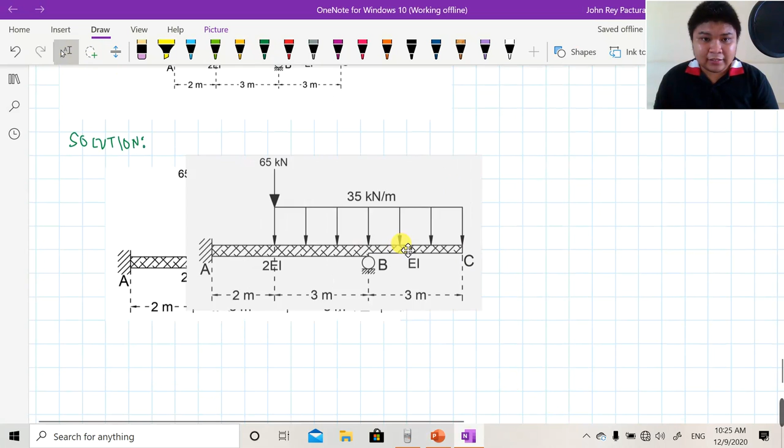For instance, let me label this as our RB. On the other hand, let me also label this as RA, and at the same time, this is the moment at A. So what I'll do is express both RA and the moment at A in terms of RB - so RA in terms of RB, and the moment at A in terms of RB respectively.

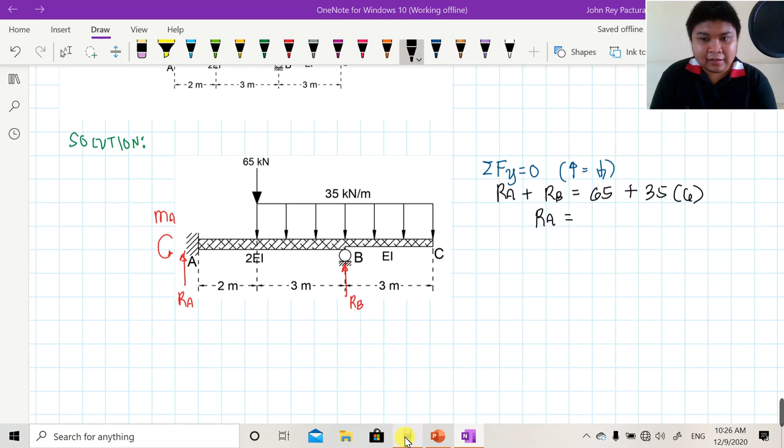Using the equations of equilibrium, summation of forces vertical equals 0, so up equals down. The upward forces are two: RA plus RB, while the downward forces are 65 kilonewton concentrated load plus 35 times 6. Simplifying this, RA equals 65 plus 35 times 6, which is 275, minus RB. So now we have RA in terms of RB.

Let's do the same thing for the moment at A. This time, summation of moment at A equals 0, clockwise moment equals counterclockwise. The clockwise moments are two: the 65 kilonewton clockwise moment multiplied by the moment arm of 2, then the 35 uniformly distributed load with length 6 meters, whose center of gravity is located at 2 meters plus half of 6 meters, so 2 plus 1/2 of 6. Now we've completed the clockwise moment.

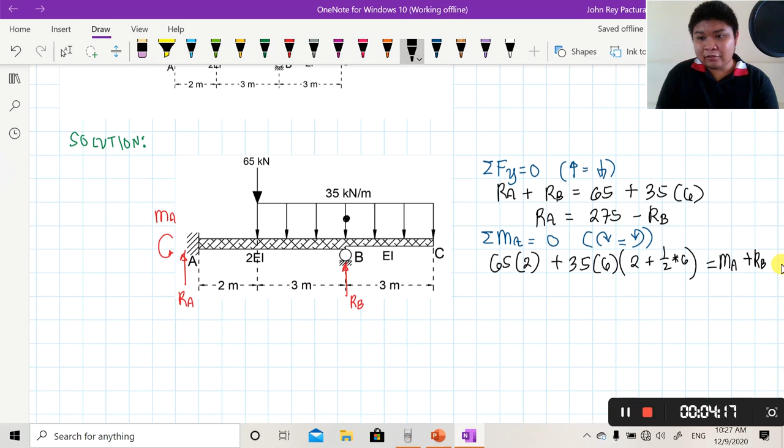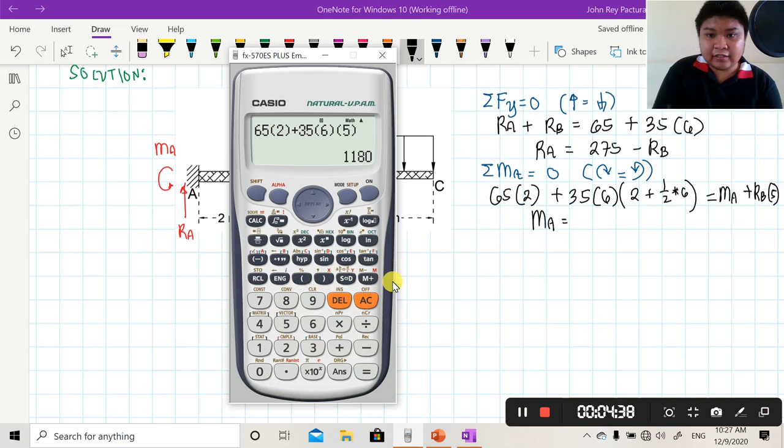That equals the moment at A plus RB times 6 - wait, RB times 5, since the distance of support B is 5 meters from point A. Simplifying this, the moment at A equals 65 times 2 plus 35 times 6 times 5, which gives us 1,180, minus 5RB. So now we have RA in terms of RB and MA in terms of RB.

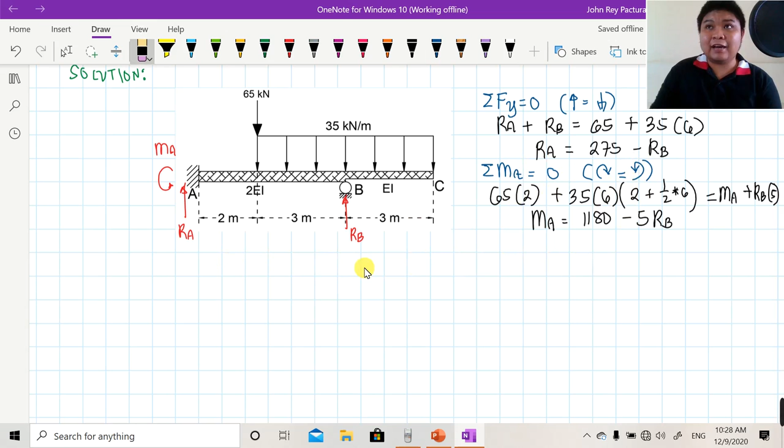Now, after this, we'll draw the moment diagram by parts. How do we draw it? 5 meters, then there's another 3 meters here. Let me draw our original beam first - this is a fixed support, and this is a roller support here. And let's not forget to consider the loads themselves.

Then, is this the load? At the top, 35 kN per meter. Okay, 35 kN per meter.

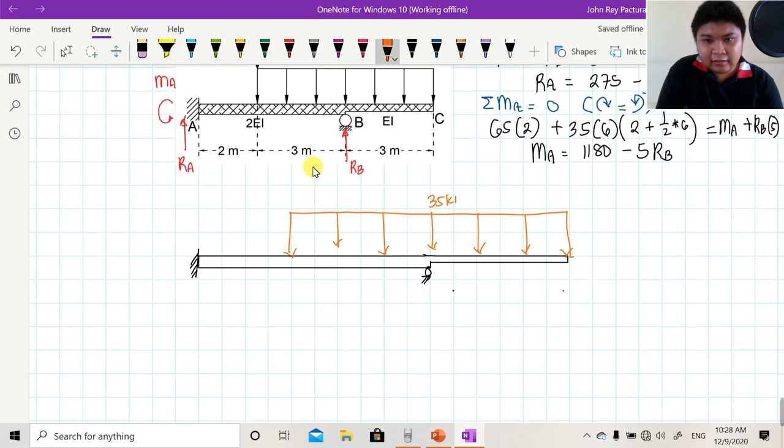Then, 65 kilonewtons. Let's place our reaction as RB. But instead of RA, let's write it as 275 minus RB. And instead of MA, let's write it as 1180 minus 5 RB, so that at least only one variable class appears as unknown here.

Then the distance, of course, this is 2 meters, this is 3 meters, and 3 meters. The flexural rigidity is 2EI, then EI. And let's place points A, B, C.

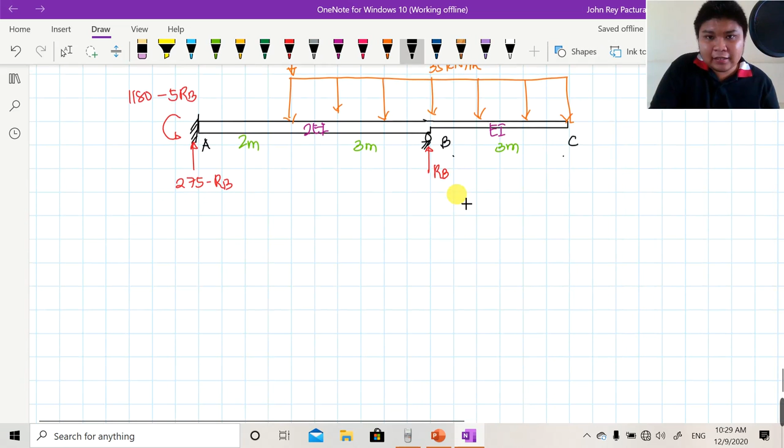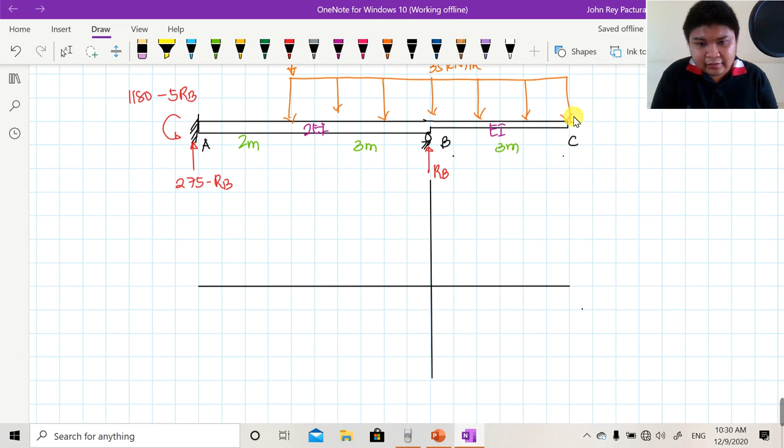So for example, here it is. As I said, our fixity is at point B. So let's start with this 275 minus RB. If you look, its distance from point B is 5 meters.

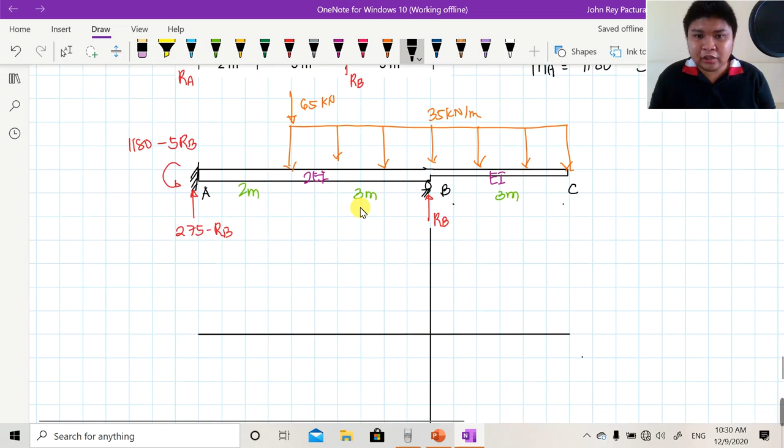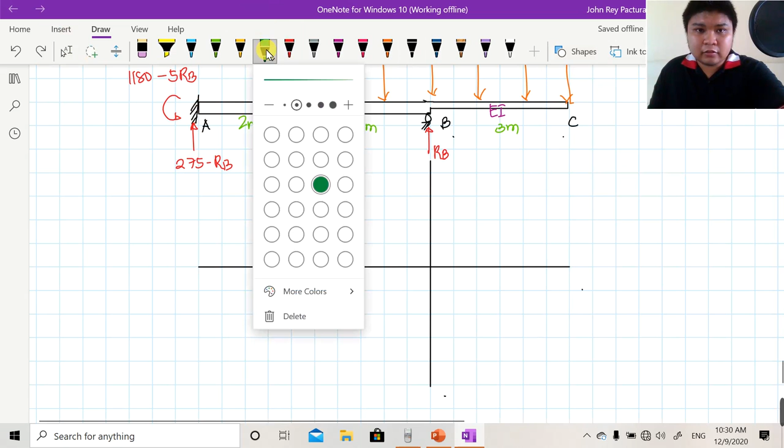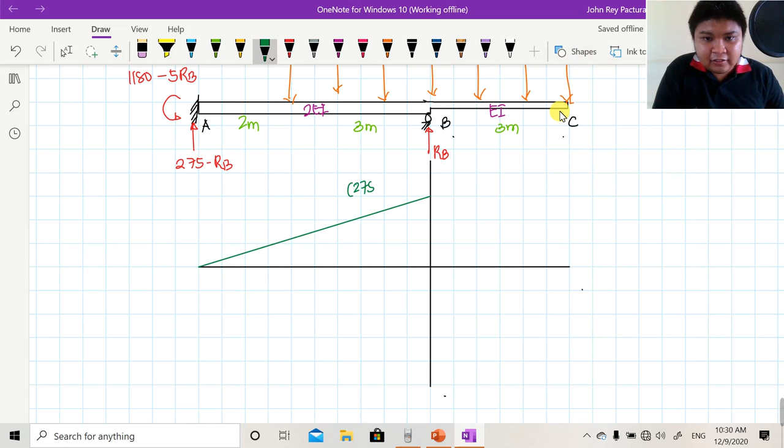So when we draw that, it will just be a line since it comes from a concentrated load. The height of the triangle will be 275 minus RB, then of course, multiply by 5 meters.

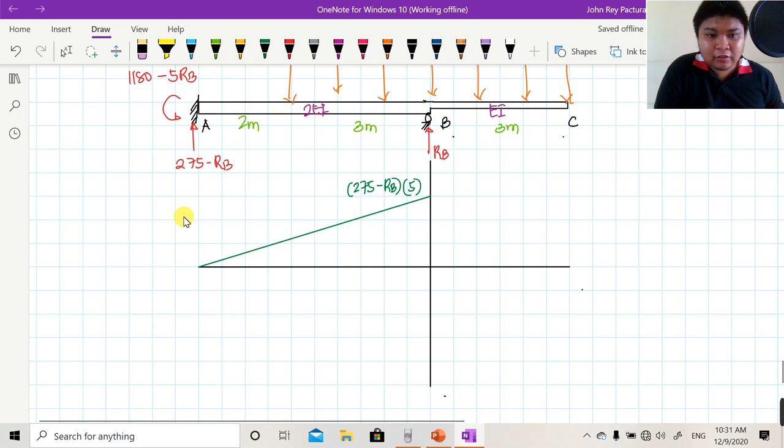On the other hand, we also need to consider a moment. But this time, this is a negative moment. So the moment diagram by parts for it will be below, and that will be a rectangle since it comes from a concentrated moment. Its value will be 1180 minus 5 RB.

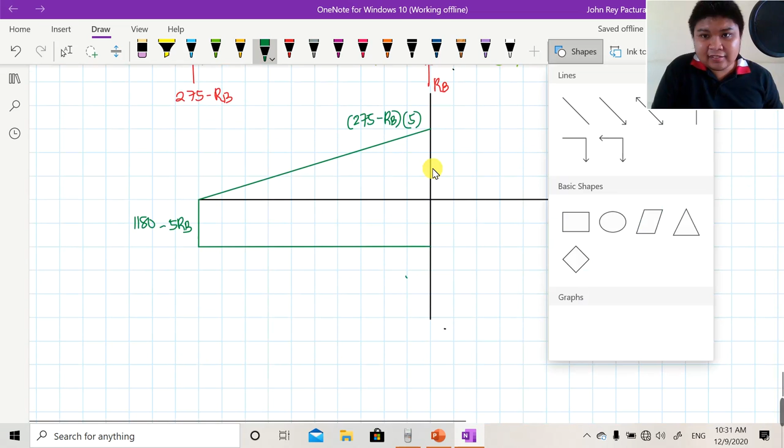And here, we still need to consider 65 kilonewtons downward times 3 meters, so that's a triangular load. When we compute that, 65 times 3 equals 195.

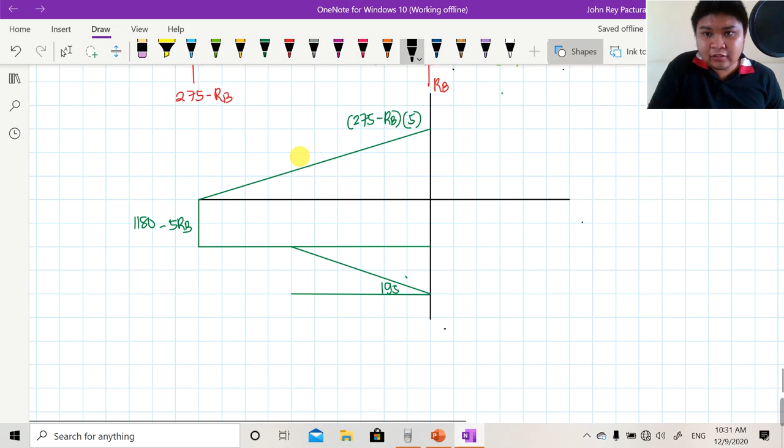And our final one is this distributed load, which we also need to draw. So our magnitude is 35. Let's compute 35 times 3, then half of 3, since the center of gravity is 1.5 meters from point B. Again, our fixity is at point B.

So the moment or the height of the spandrel is 157.5. Let's place that as 157.5. There, let me also label the degrees, first degree and second degree.

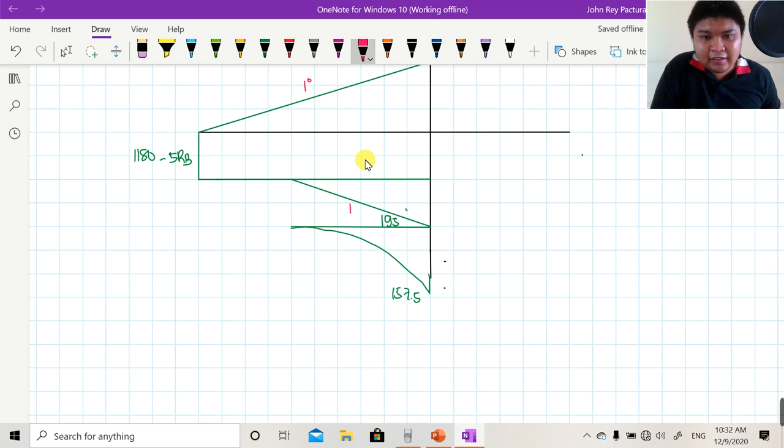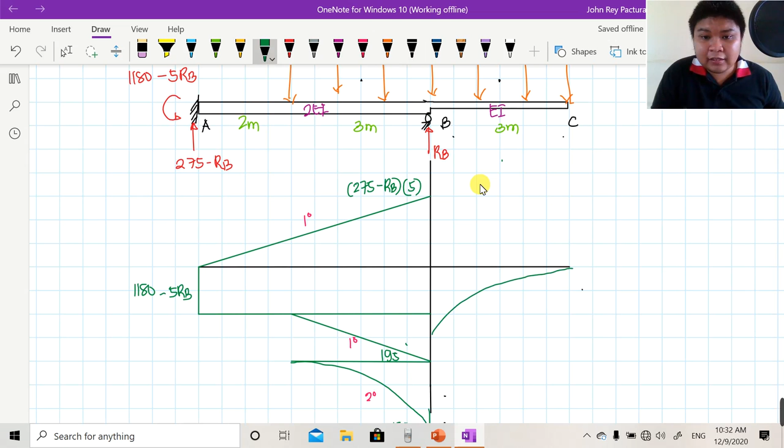And on the right side, this RB, you can't simply draw it since it acts right at point B. So what we can draw is this 35 kilonewton per meter distributed load, with a length of 3 meters, and its center of gravity located 1.5 meters from B. So when you draw that, it will just be this, and its value will simply be 157.5.

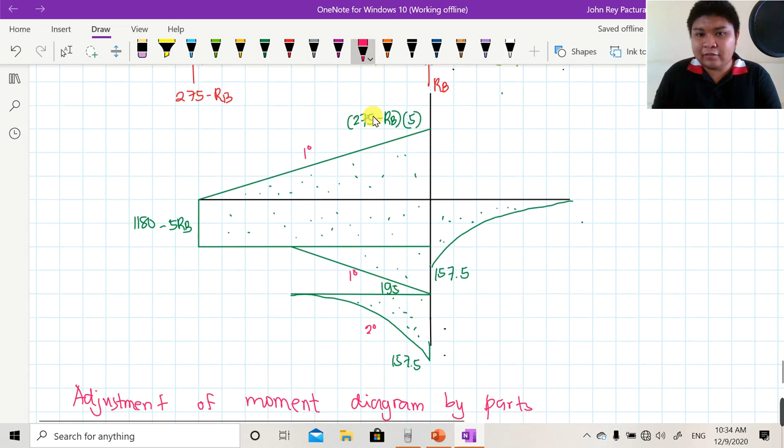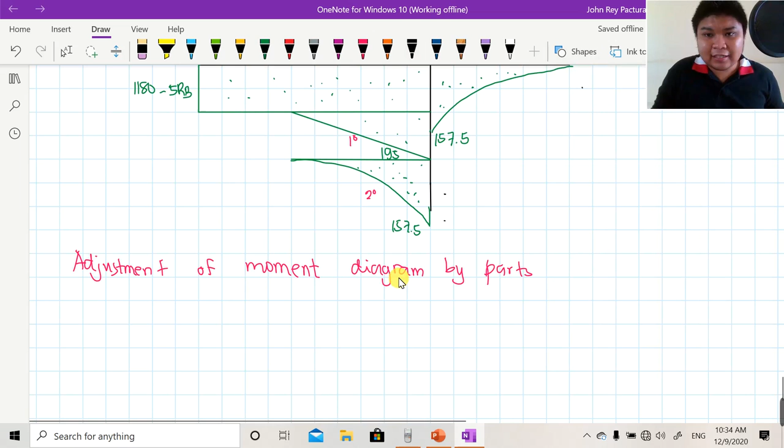For the right side, there's no need to perform division since its flexural rigidity is already EI in the first place. So what we only need to adjust is the left side.

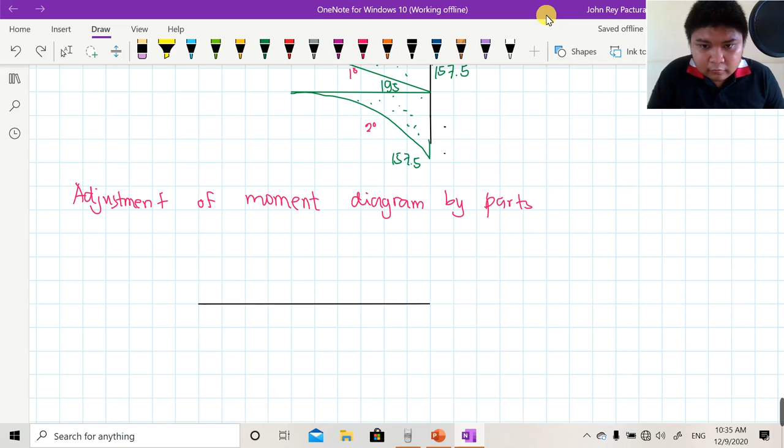So, balikan natin itong nasa taas, pero instead na ang height nitong triangle is this one, i-divide ko siya ng 2. So, therefore, ang kalalabasan nun class ganito: 5 over 2 ng 275 minus RB. Dapat ganyan yung maging sagot nyo, no? 5 over 2 ng 275 minus RB, kasi syempre 5 divided by 2.

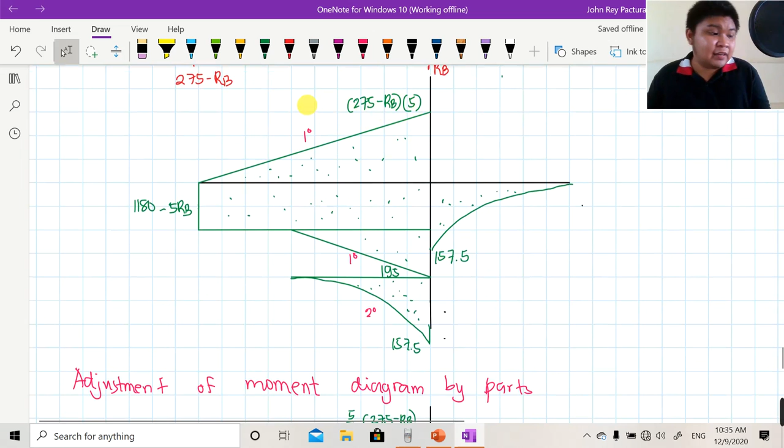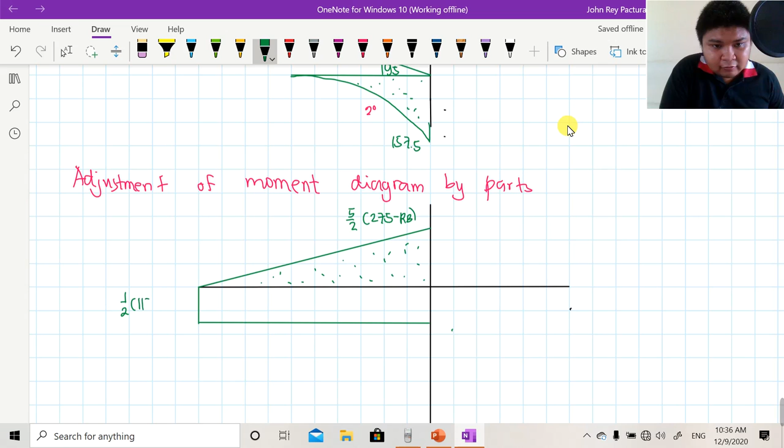So, nandito rin, ganun din ang gagawin nyo sa rectangle load dito sa baba. Ang magiging sagot dito ay 1/2 ng 1180 minus 5 RB. Minus 5 RB, kasi yun yung original na height niya.

Then, design ka na lang dyan. Lagay ko pala na first degree dito. No, first degree, 0 degree. Next, yung 195, divide mo din ng 2. 195 divided by 2 is 97.5. And that will be a first degree, no? Kasi galing siya sa concentrated load. So, 97.5. So, ayan, konting design. Then, labelan mong first degree.

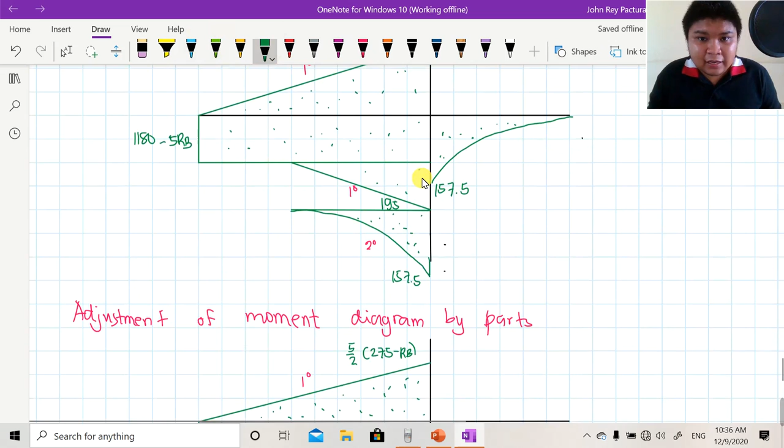And lastly, the spandrel. Kailangan din natin yung spandrel natin. That is 157.5. So, yung 157.5, divide mo din ng 2. Ang lalabas ay 78.75. So, yun, drawing lang tayo ng spandrel. 78.75 siya. Well, dito, sa kabila, there is no need nga to adjust dahil EI naman yung kanyang flexural rigidity. So, ilagay mo na lang as 157.5.

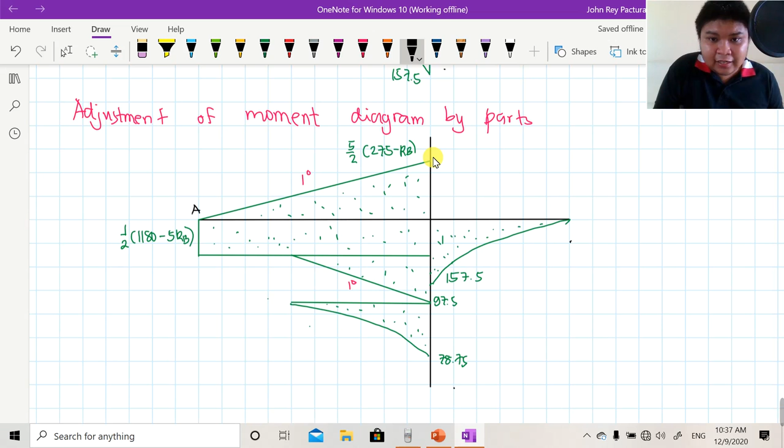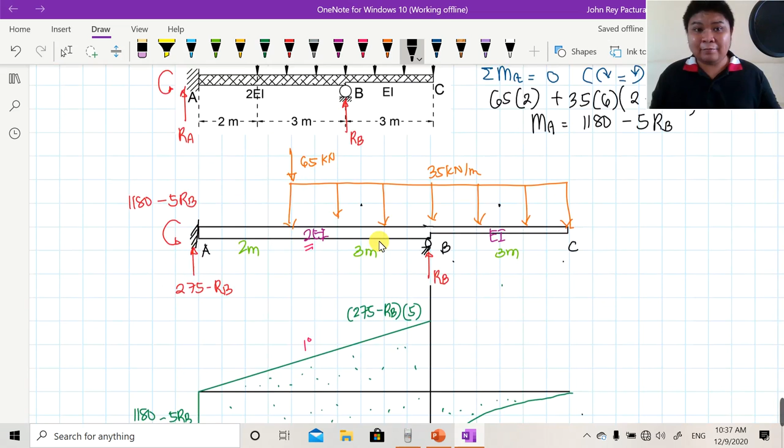Place ko siya as point A, point B, and point C. So, after natin ma-drawing yung moment diagram by parts, by the way, nakalimutan ko palang i-label dito na by moment area method to, no? Solution by moment area method.

So, ang gagawin natin, ito yung original drawing natin, and malamang yung deflected shape niya will look like this. Diba? So, usually, ganito yung magiging deflection niya. But the process will be the same class. Dahil yung slope ng A ay horizontal and yung point B is yung nandito, so still, the deviation of B with respect to A is always equal to 0.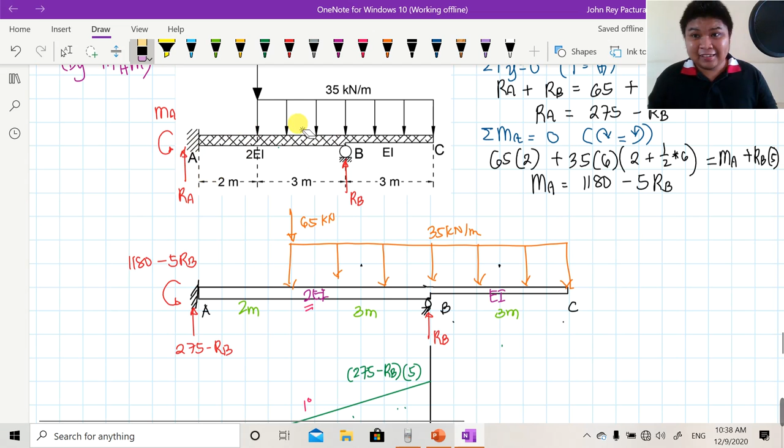Ulitin ko, dahil yung slope at A pa rin is horizontal, at the same time, yung B is a support, dapat ang maging analysis mo dito, the deviation of B with respect to the slope at A must be 0. Okay? Kasi walang deflection sa B. So, sige, sulat na natin yon na EI, deviation of B with respect to A, which is equal to 0.

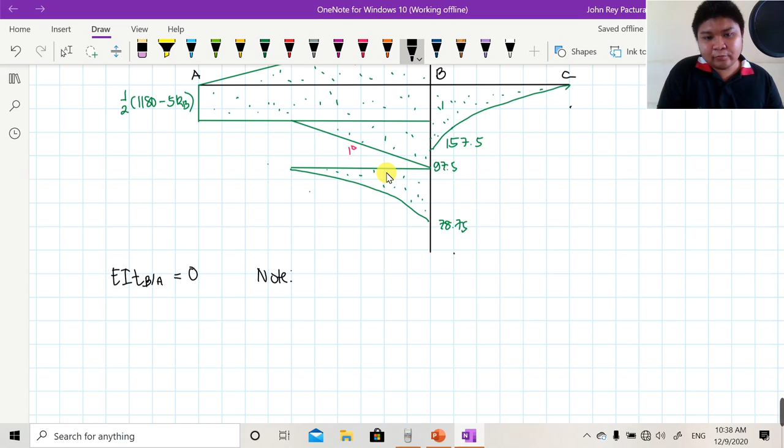And but take note na lang na alam natin na ang formula ng EI, deviation ng B with respect to A, ano nga yung formula nun guys? That is equal to area between AB multiplied by the centroid at B. So technically, walang silbi ito. Diba? Technically, walang silbi yung sa BC dahil ang concern lang natin is the area at AB.

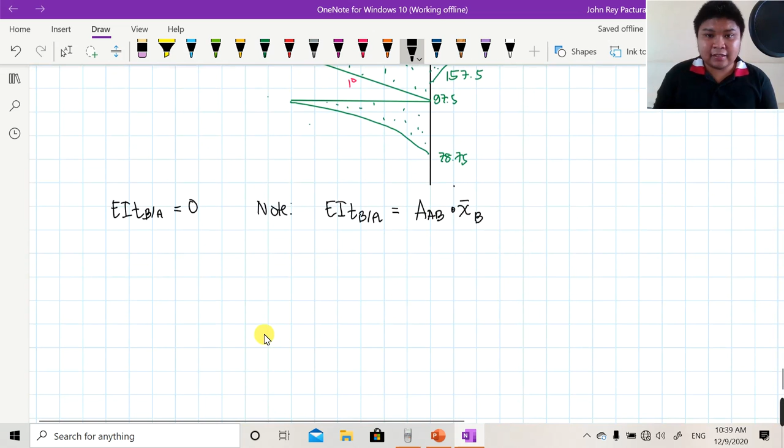Gayunman, mas maganda pa rin naman na kumpleto yung drawing nyo ng moment diagram by parts. So to perform the analysis, kasi ang goal lang naman natin class ay mahanap nyo yung RB. Then after you solve for RB, kaya nyo nang masolve yung RA and moment A. So sige, gamitin na natin to. Yung area at AB. So, apat lang naman, this triangle, this rectangle, this triangle, and this spandrel. Nakalimutan ko palang i-label na second degree to, no?

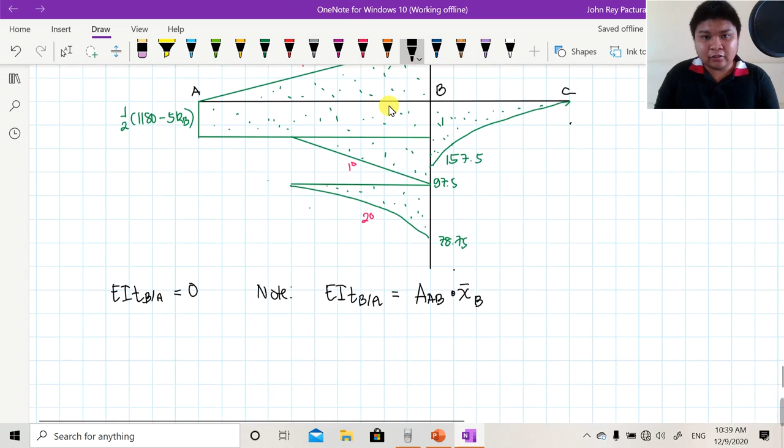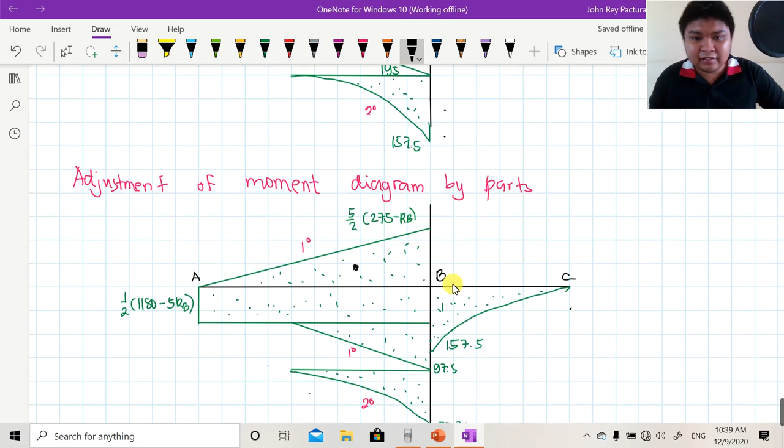So, unahin ko muna yung triangle, ang nag-iisang positive, no? So, what that is equal to 1/2. Ang base natin ay 5 meters, tapos ang height ay 5/2 ng 275 minus RB. Okay? So, of course, yung kanyang center of gravity is located somewhere here, and this distance is 1/3 of 5 meters. Kasi, di ba nga, centroid with respect sa point B. So, that will be equal to 1/3 times 5.

The rest ay negative naman na. So, for instance, yung ating base dito sa rectangle is 5 meters. Tapos, yung kanyang height ay 1/2 ng 1180 minus 5 RB. And malamang yung center of gravity niya ay 1/2 ng 5. Okay? Diba magiging 1/2 ng 5 dahil nandito yung center of gravity.

Next is this triangle. So, subtraction ulit dahil nasa baba. 1/2 ng base ay 3. Ang height ay 97.5. 3, 97.5. And yung center of gravity niya is located here, and that is equal to 1/3 of 3.

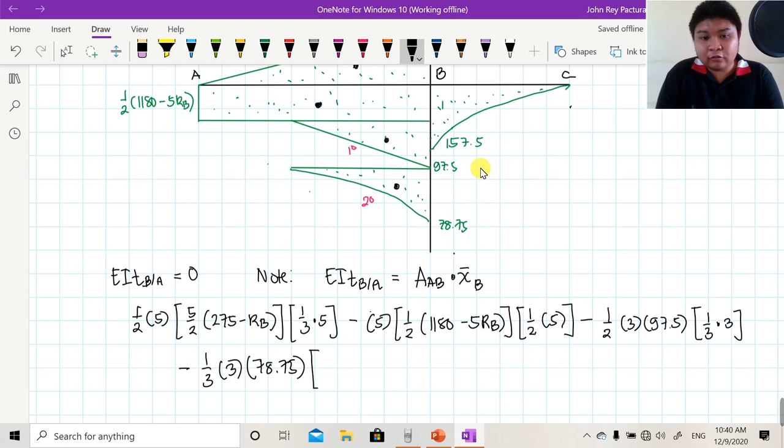So finally, another subtraction para sa spandrel, that is 1/3. Ang kanyang base ay 3. Tapos, ang kanyang height ay 78.75. And lastly, yung kanyang center of gravity is located somewhere here. So that is equal to 1/4 ng 3. And that will be equal to 0. So medyo mahaba siya, I really doubt na magkakasya ito sa calculator.

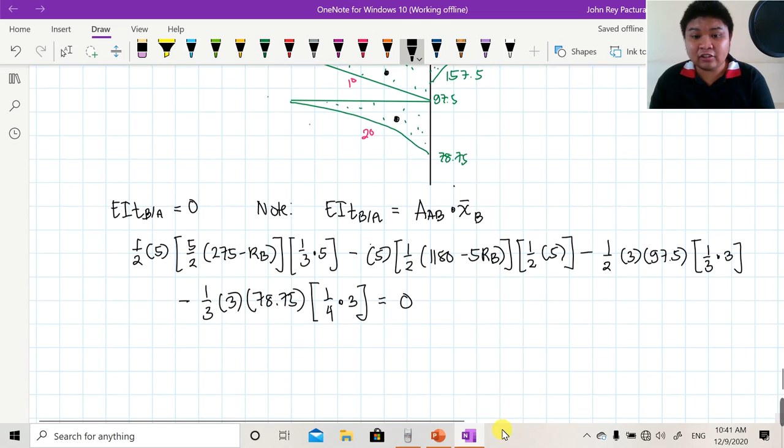Siguro, pwede nyo na muna itong i-simplify for a while. For instance, yung mga constants kasi kaya naman. Halimbawa, dito sa unang term, magiging 1/2 ng 5, tapos times 5 halves, then 1/3 ng 5. So yung point ko dito, i-simplify mo muna yung ating function para naman magkasya siya. So that is equal to 125/12. So 125/12 ng 275 minus RB.

Next is, isimplify din natin itong sumunod. So that is equal to 5 times 1/2. Tapos, that is 1/2 ng 5. I am referring to this one, no? Minumultiply ko lang ito, tapos dito, para ang maging sagot ay 25/4 ng 1180 minus 5 RB.

So mas magandang tingnan, itong natitirang dalawang terms, you can perform that na dire-diretso. Halimbawa, negative 1/2 ng 3, tapos 97.5, and the centroid is 1/3 of 3. On the other hand, yung nandun naman, the last one, another minus 1/3 ng 3, tapos 78.75, then 1/4 ng 3. Okay, so ang sagot natin dito ay negative 205.3125. So minus 205.3125, tama ba? Yes, so this will be equal to 0.

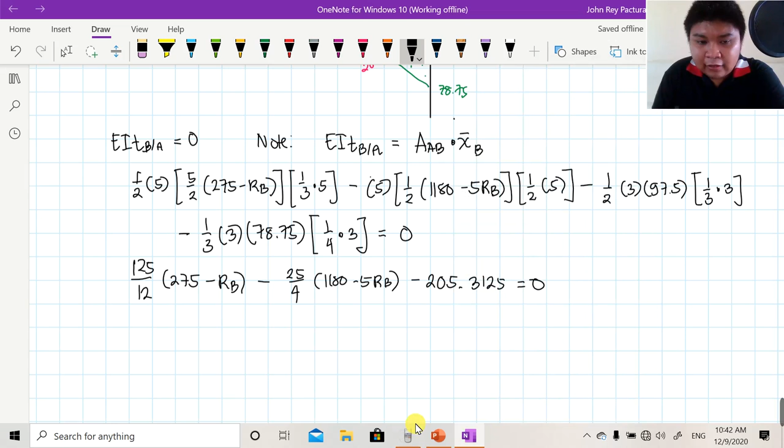So di hamak na mas simple naman na to para i-shift solve nyo. Pero ulitin ko, if your calculator can do this long equation, kaya niyang i-type, walang problema. Pero I doubt sa Casio kung kaya siya. I'm not sure though, ayaw ko na din naman i-try. So therefore, yung RB is equal to, pag tinype ko na lang yung mas simplified na version,

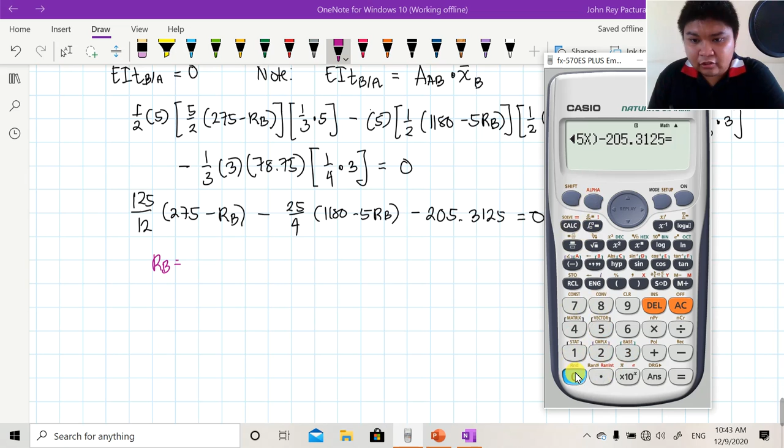125/12 ng 275 minus x minus 25/4 ng 1180 minus 5x then minus 205.3125 and that is equal to 0. So shift solve, ang lalabas ay 226.355 kilonewtons. So ayan, na-solve na natin class yung isang reaction.

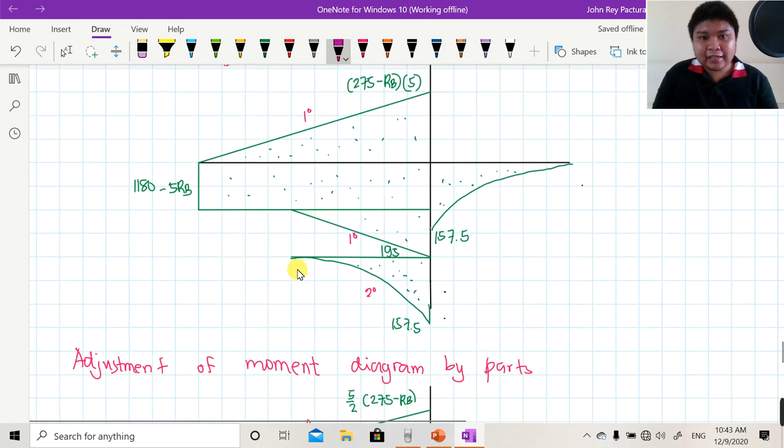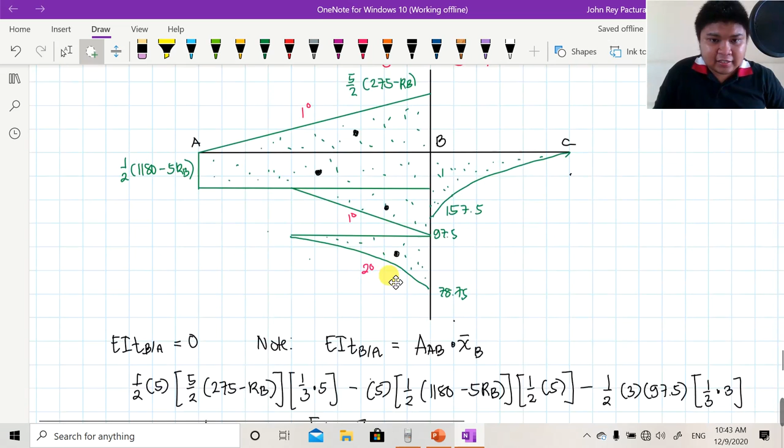So therefore, kung babalikan natin ito, i-copy ko na lang siya. Control C. Lalagay ko na lang solve for other reactions by equilibrium. I-paste na natin siya. Adjust ko lang siya ng onte. So pwede na natin yan gawin dito.

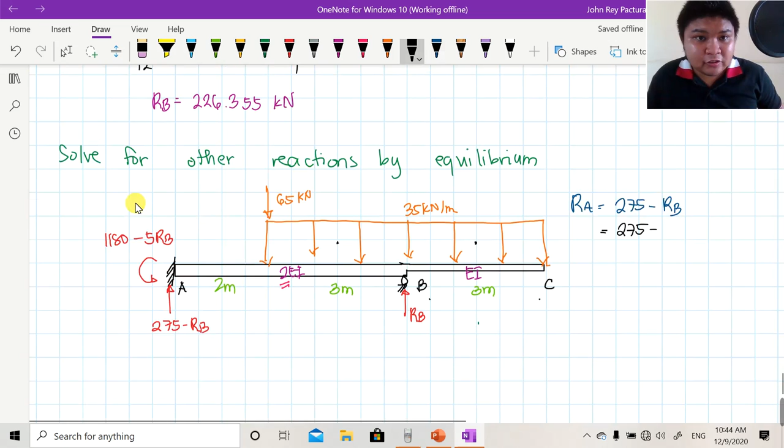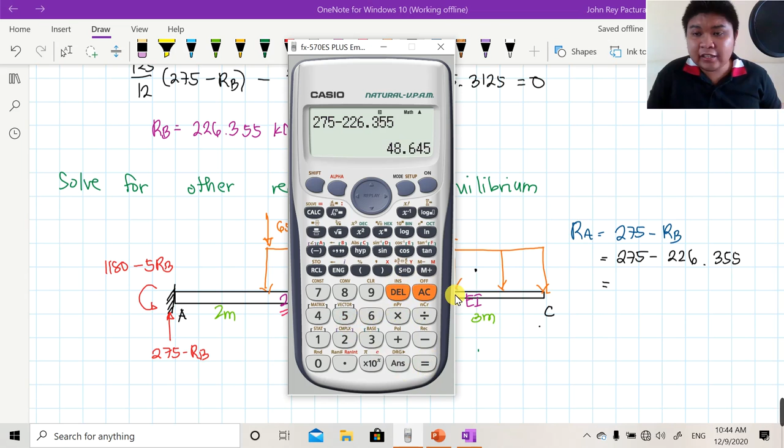Ang magiging RA natin ay equal sa 275 minus RB. And just substitute the values, that is 275 minus 226.355. Ang magiging sagot natin class ng RA ay equal sa 275 minus 226.355 is 48.645 kilonewton.

And lastly, yung moment natin sa A ay equal sa, ilan ang magiging moment sa A? 1180 minus 5 RB, and just substitute the computed values. 1180 minus 5 ng 226.355. So tingnan natin, 1180 minus 5, 226.355, ang sagot ay 48.225 kilonewton meter. So ayan, meron na tayong RA, MA, saka RB.

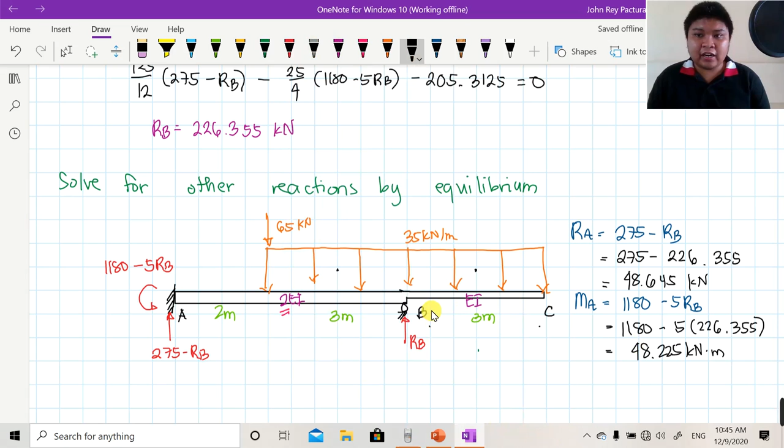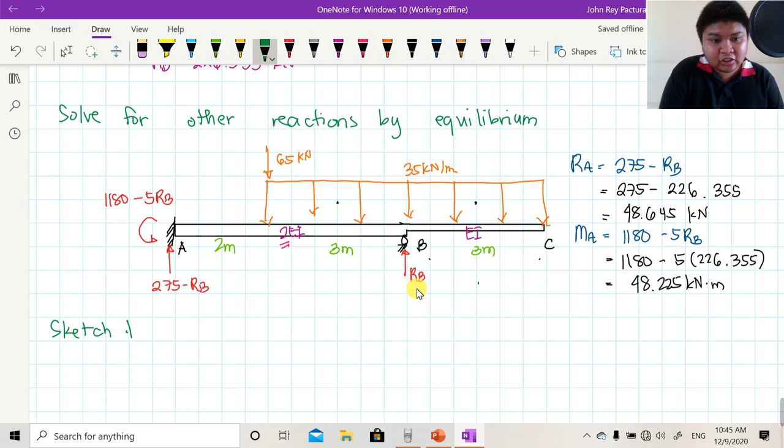So after natin ma-solve yung mga reactions, ang magiging last step na lang dito class is i-sketch natin yung shear and moment diagram. Ulitin ko, ang magiging last step natin is to sketch the shear and moment diagram kasi yun yung kailangan natin. So konting minuto, pagtsatsaga, and of course, mastery of the shear and moment diagram.

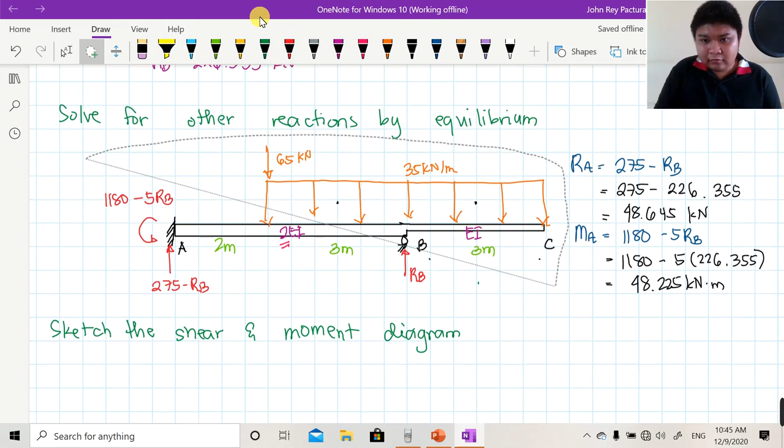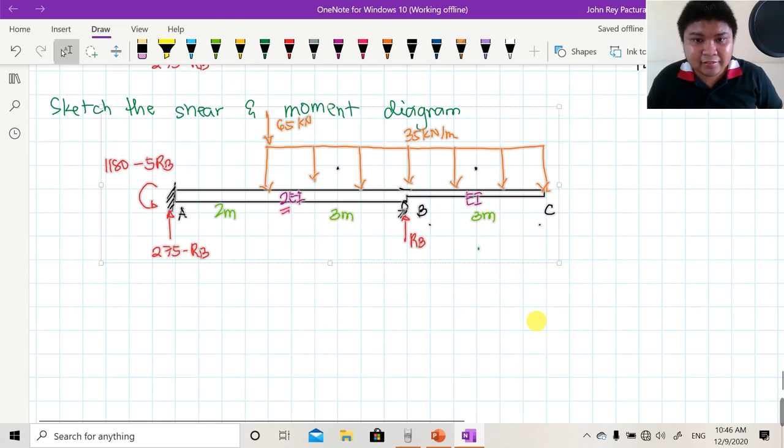Sige, paste natin siya dito. Adjust lang natin ng onte, guys. So ayan, pero dito palitan na lang natin, no? Sorry, palitan na lang natin yung mga reactions into its actual values. For instance, yung RA is 48.645 na siya. 48.645 kilonewtons. And yung MA natin ay 48.225 kilonewton-meters. Yung RB naman ay 226.355.

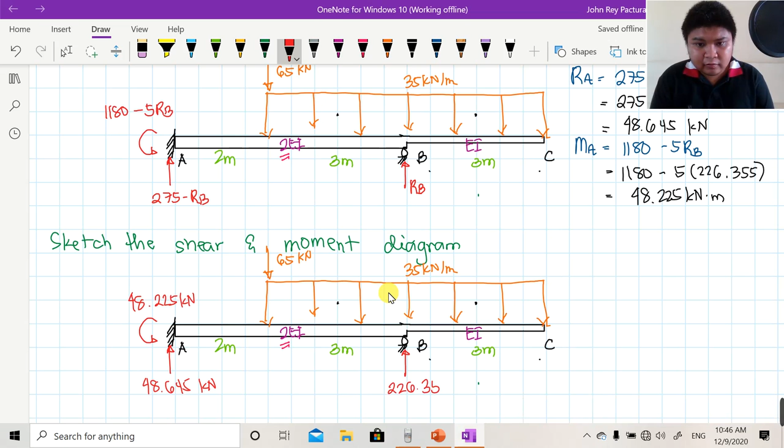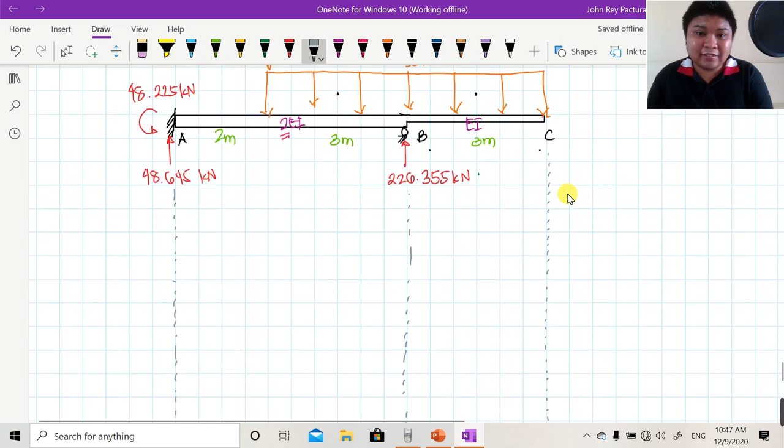Okay, so now ready na yata tayo mag-sketch ng shear diagram. Prepare lang tayo ng onte. Tapos malalaman na natin kung ano yung maximum shear and maximum moments. Kasi diba, pag maximum moments, we are going to consider both positive and negative moment. By the way, kung curious kayo bakit hinahanap natin both the positive and negative moment, pagdating kasi sa concrete design, iba kasi yung design kapag positive moment and iba din yung design pagdating sa negative moment. So dapat ganun yung magiging discussion. So sige, simulan ko munang i-drawing yung shear diagram. Unahin ko muna na may pataas na 48.645 tayo dito. Sige, taas muna natin siya.

48.645. Since walang load dito, ibig sabihin mame-maintain niya yung shear. Then biglang may 65 na mag-a-act, 65 concentrated. So that will be equal to 48.645 minus 65, ang magiging sagot ay negative 16.355.

Bagsak mo ulit yon, negative 16.355. And another distributed load, magiging minus 35 times 3. Ganun ang mangyayari, so that is negative 121.355.

Bagsak natin, negative 121.355. And of course meron tayong reaction na 226.355 pataas siya. So plus 226.355, that is equal to 105 pataas.

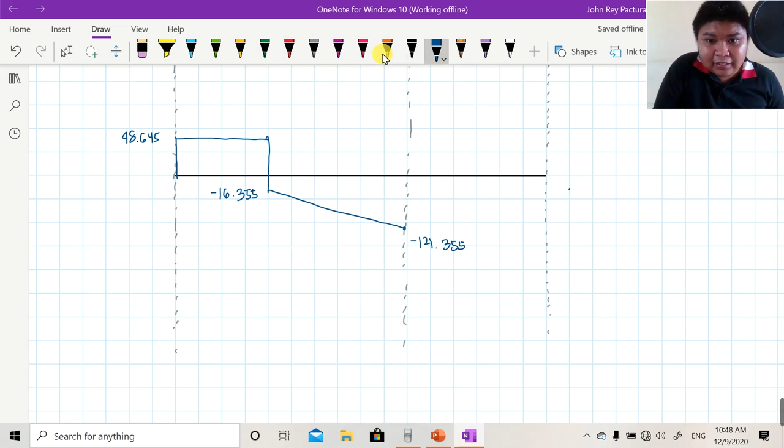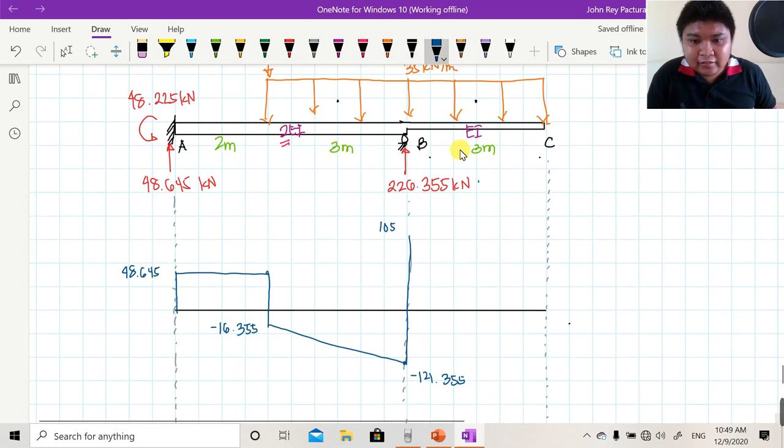Nandito na siya, 105. At yung finale natin, wait lang, masyadong erase ko lang yun. Yung magiging finale natin is ito, minus 35 times 3. Dapat magsarado siya diba? So 105 minus 35 times 3 is 0, so tama yung ating shear diagram.

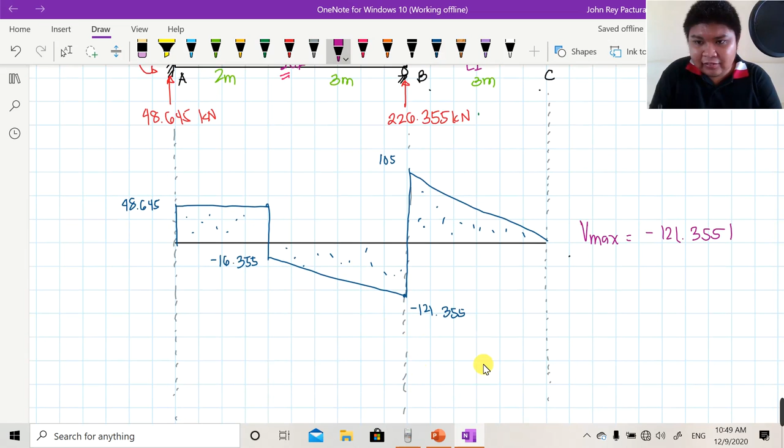Ganito yung magiging itsura. Based sa ating diagram guys, ang maximum shear is negative 121.355 kilonewton. Pwede na natin yun i-label na yung ating Vmax ay negative 121.355 kilonewton. Para naman sa moment, madali din naman yung moment.

Kasi madali lang naman talaga ang structural analysis, huwag lang pasukan ng triangular load. Lahat naman humihirap kapag may triangular load. Pero syempre kailangan mo rin yon nasagutan dahil kasama yan sa structural analysis.

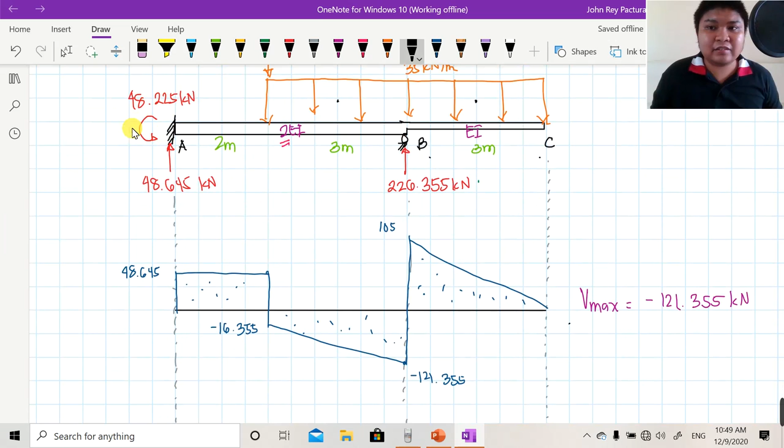So for the moment diagram, unahin ko muna ito. Based sa drawing, counterclockwise siya, so this must be negative. So negative 48.225 siya, okay? Sige, lagay natin siya as negative 48.225.

Tapos itong area natin is a rectangle, so therefore that is simply a first degree. Ibig sabihin negative 48.225 plus... ay hindi, hindi siya 1/2 kasi rectangle siya, 2 meters tapos 48.645. Tama ba? Yes tama. So that is equal to 49.065.

So this will be located somewhere here, this will be a straight line. Sige, type natin 49.065.

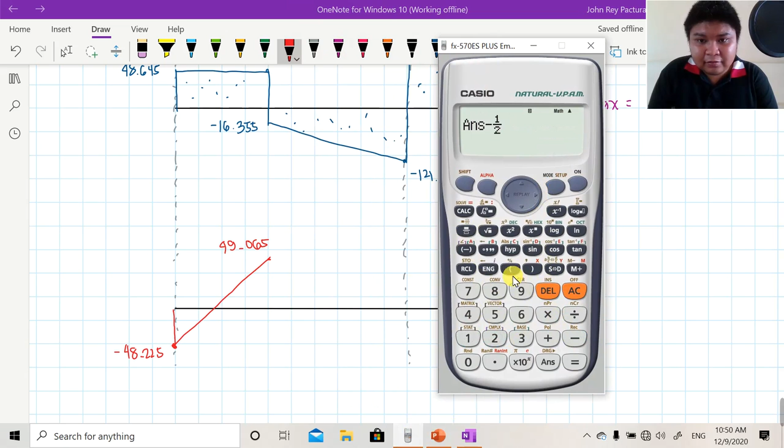However, mag-change na siya kasi may trapezoid na nasa baba. So therefore, that will be equal to minus, diba, 1/2. Yung base ng trapezoid natin ay 3 meters and yung height niya ay 16.355 plus 121.355. So therefore, that will be equal to negative 157.5.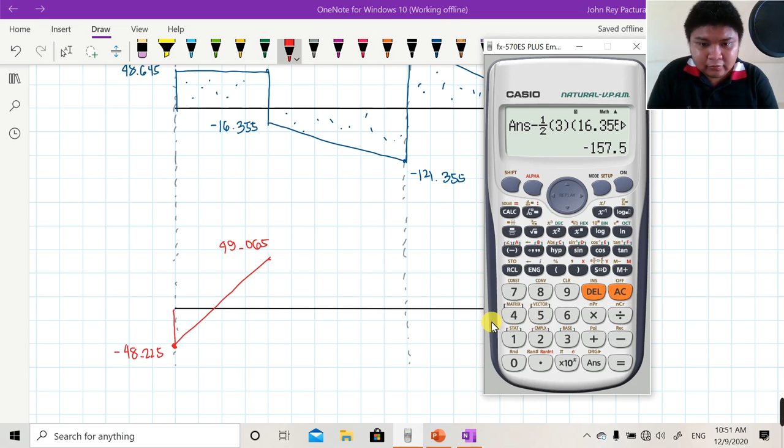So kapag drawing natin yan, most likely magiging ganito siya. Second degree na yan, type natin negative 157.5. And para masarado natin, meron pa tayong co-consider na triangle.

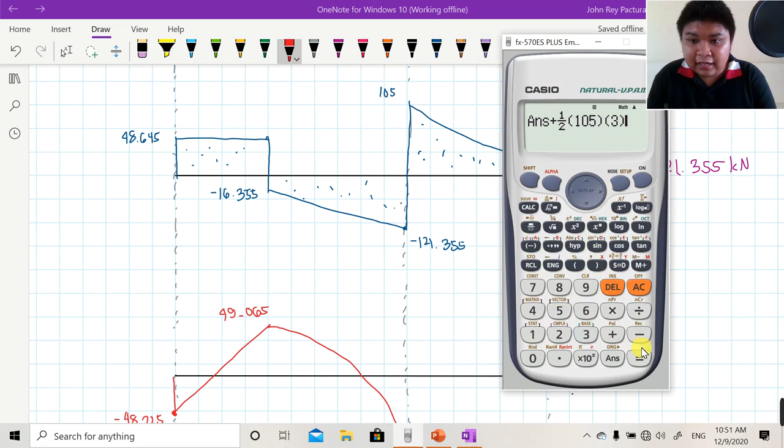Magdasal ka na lang na dapat maging positive or maging 0 to. Plus 1/2 ng 105, then yun na nga, 3 meters, then yun naging 0 siya. So ibig sabihin, ito yung magiging itsura ng moment diagram ng ating structure.

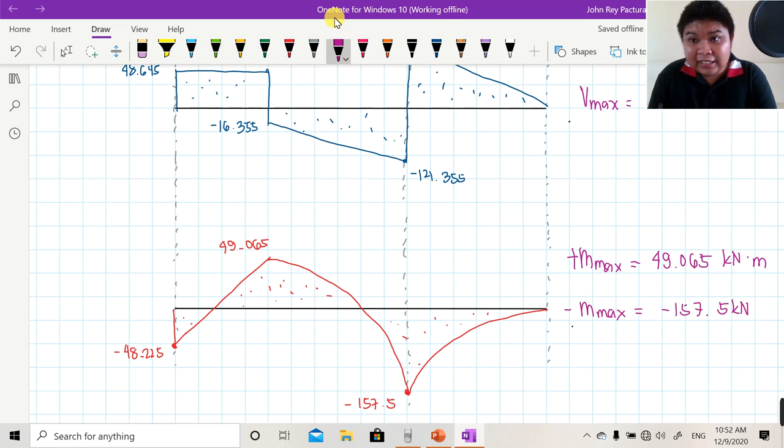Konting design na lang. Based dito sa diagram natin, pwede natin class malaman na yung maximum positive moment natin ay equal sa 49.065 kilonewton meter. At the same time, yung maximum negative moment ay negative 157.5 kilonewton meter. So ayan na, tapos na tayo class sa ating structural analysis.

Pwede na natin tong gawan ng summary. Ang tinatanong lang naman, of course, the reactions. So the reaction at A, based dito sa ating final answer, ay 48.645 kilonewton. Tapos yung moment reaction sa A ay equal sa 48.225 kilonewton. Yung reaction naman sa B ay equal sa 226.355 kilonewton.

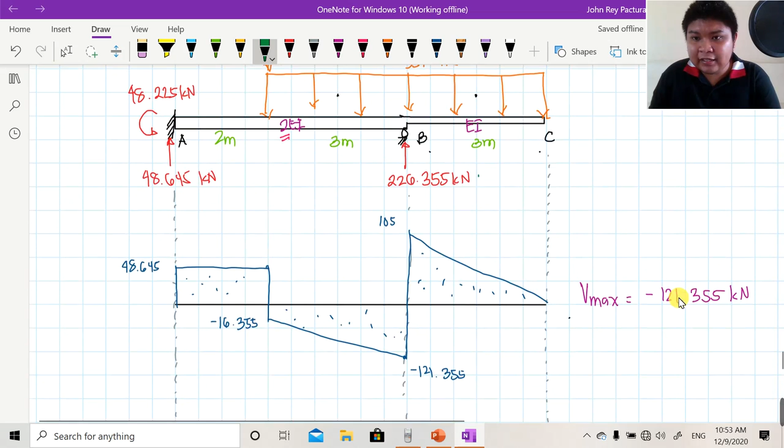Tapos yung maximum shear natin, since negative yung maximum shear, sulat na lang natin as negative 121.355 kilonewton. On the other hand, yung ating maximum positive moment, itong moment at A, nakalimutan kong dapat kilonewton meter siya. Yung maximum positive moment at A natin ay equal sa 49.065 kilonewton meter dito.

And yung panghuli, the maximum negative moment is equal to negative 157.5. So ayan na, i-box na lang natin para ma-finalize na natin itong ating structural analysis.

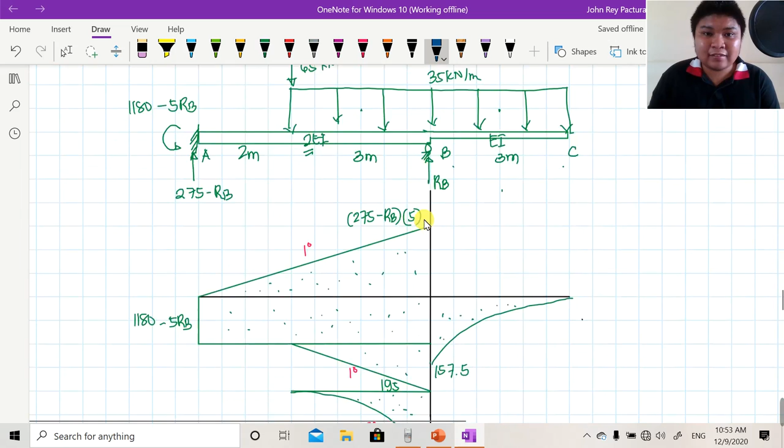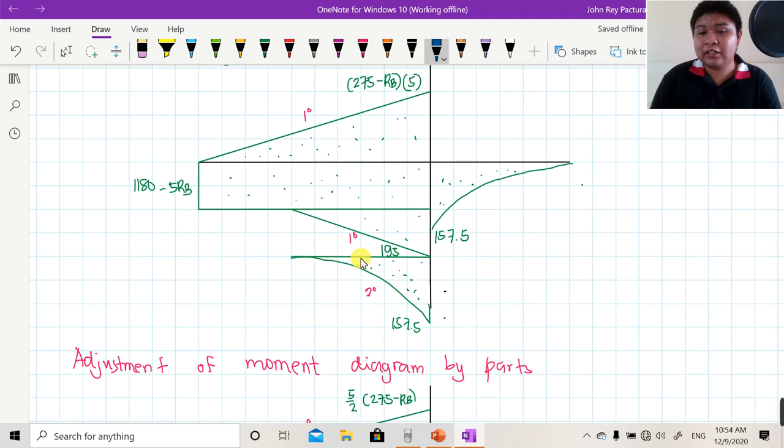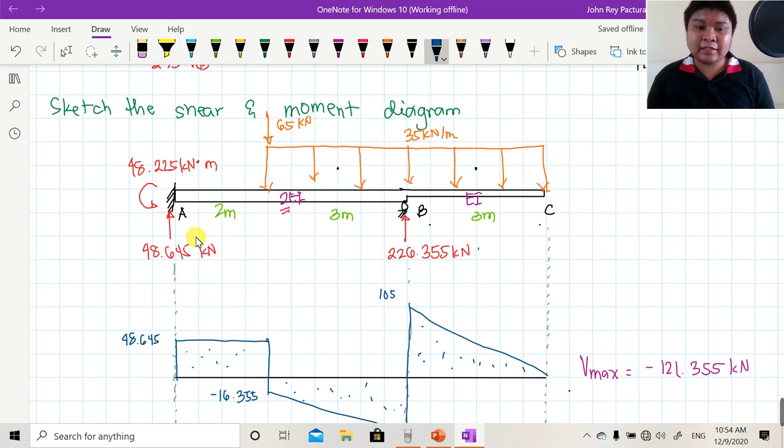So dito na guys, natatapos yung ating lesson. So recall lang natin kung paano. Unang step, hanapin natin yung value ng RB, bahala ka na lang sa diskarte, pero ang pinili ko is the moment area theorem. Then after nun, pag nahanap nyo na yung value ng RB, our next step is of course solve mo na lang yung RA and moment at A. Then after nyong mahanap yung RA and moment at A, ang magiging last step is to draw the shear and moment diagram para malaman yung maximum shear, maximum positive and negative moment.